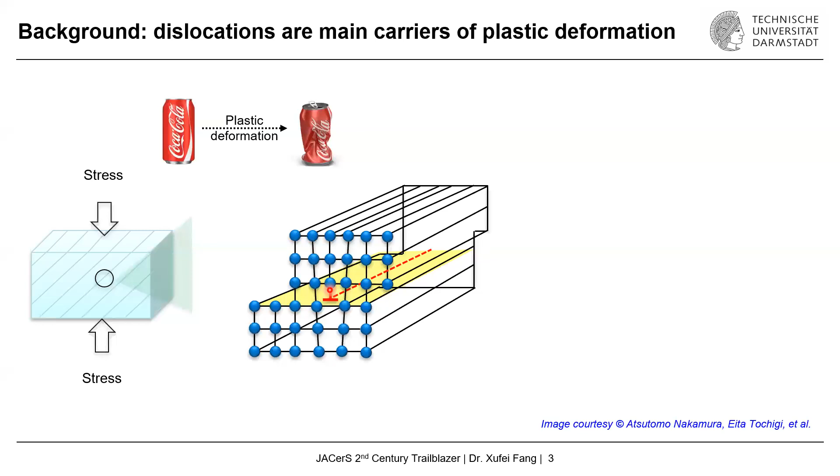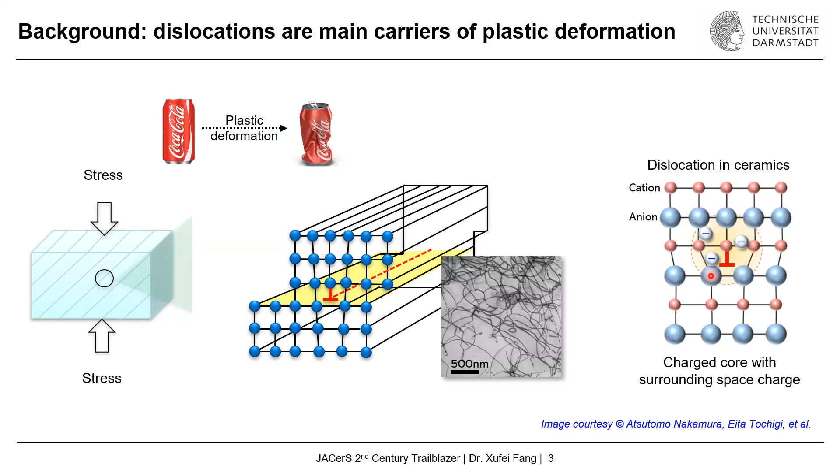Dislocations have been very well studied in metals. In comparison, dislocations in ceramics may carry charge at the dislocation core regions, surrounded by a space charge layer for charge neutrality. Together, coupled with the high strain field around the dislocations due to the high lattice distortion, this brings us a new perspective of using dislocations, for example, to tune different types of physical properties such as electrical conductivity, thermoelectric performance, ferroelectric properties, and even surface reactivity.

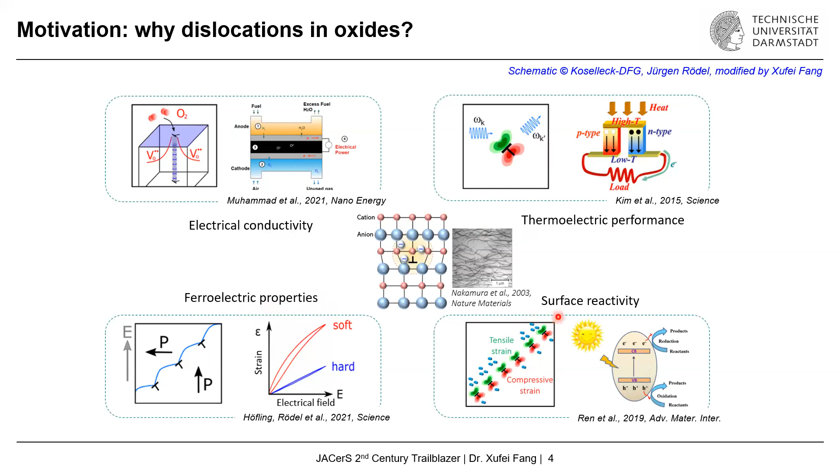I will show you several examples later. This brings us a new perspective of rethinking ceramics engineering for dislocation technology.

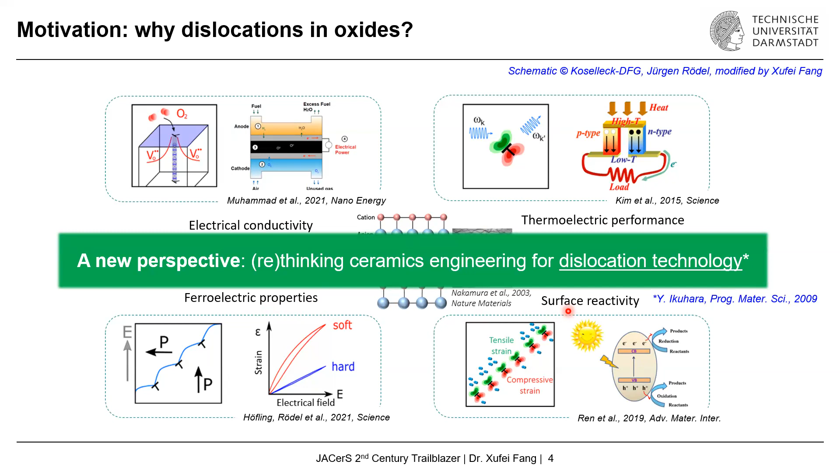For example, here I showcase using single crystal barium titanate deformed at high temperature, where we can introduce dislocations. This has helped to improve the large piezoelectric signal d33* by almost 19 times, mainly due to the dislocations we imprinted in the first place, which started pinning the domain walls and helped enhance the electromechanical properties.

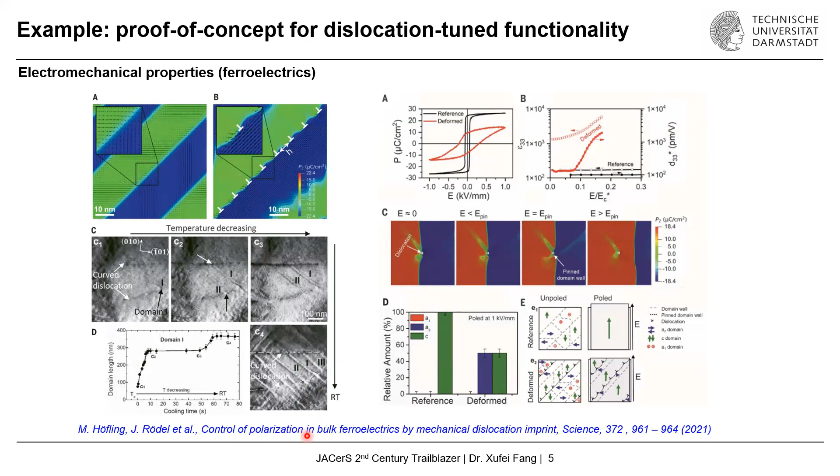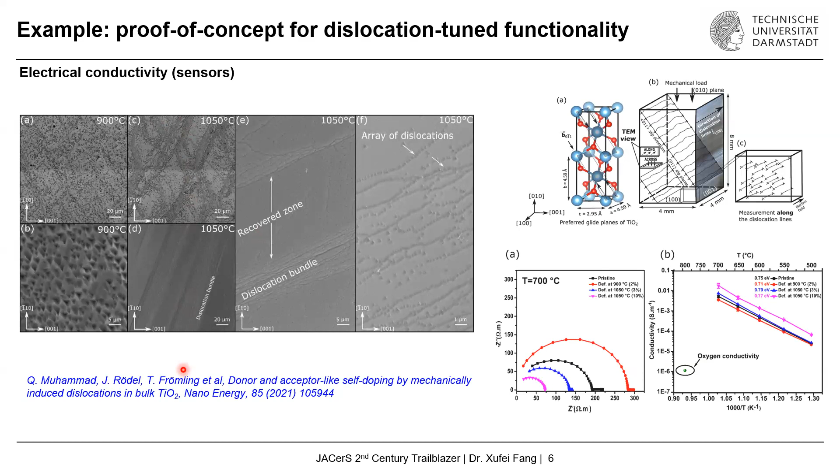Due to the time issue, I will not go into details, and I would recommend you read this paper from our ceramics division. Another example is high temperature deformed titanium dioxide, where dislocations are proven effective to enhance electrical conductivity. So in order to achieve all these types of functional properties, the prerequisite is to successfully engineer dislocations into ceramics without breaking them.

Here I would like to give you a brief overview of the methods to introduce dislocations into ceramics, which can mainly be divided into two parts: the first is processing and fabrication, and the second is through mechanical deformation.

For example, here is a bicrystal alumina fabricated by thermal diffusion bonding. Simply put, you take two single crystals and bond them together with a specific tilted or twisted angle. You will be able to engineer edge or screw type dislocations at the grain boundary. By the way, this is the grain boundary, and the dislocations are threading into the paper, or into the screen, in the 3D dimension.

Another example is the so-called flash sintering technique. The green body here is subjected to an electric field and electric current flow, and due to the highly non-equilibrium process, dislocations can be generated or maintained in the bulk. But the challenge of using this technique is that besides dislocations, we can also see a lot of other types of defects, for example voids, pores, and grain boundaries, making the scenario rather complicated to solely study the dislocation-based mechanical and functional properties.

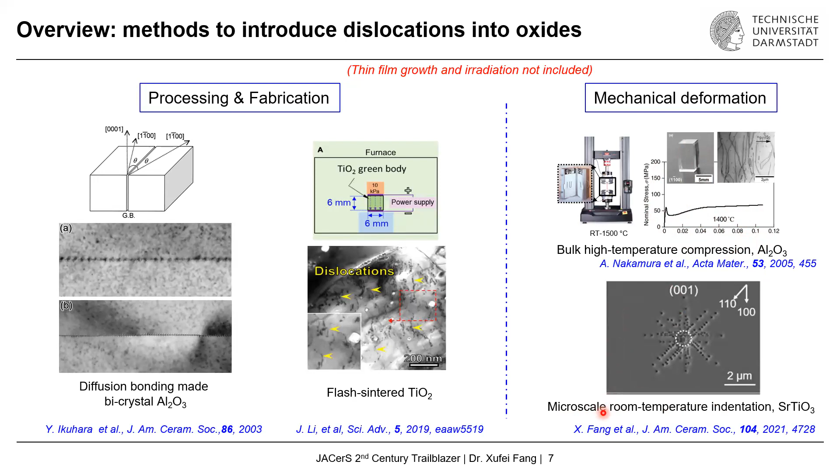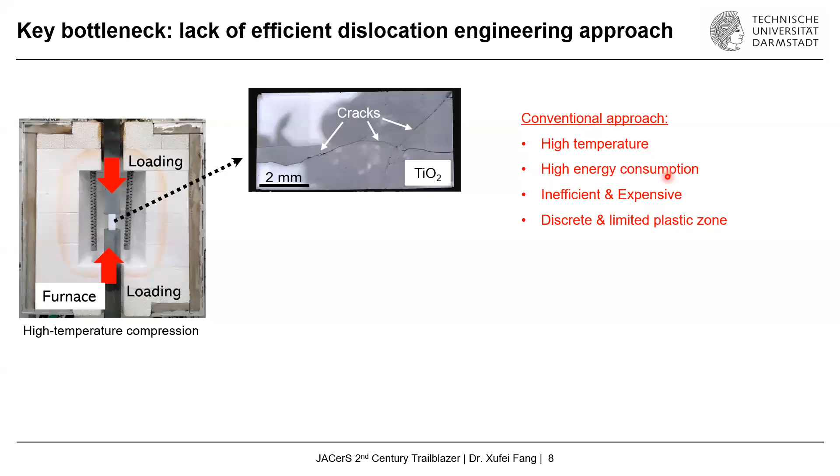As I mentioned, the key bottleneck to achieve the dislocation technology is to successfully engineer dislocations into ceramics, which are very often brittle, especially at room temperature. Currently, there seems to be a lack of efficient dislocation engineering approach. Even high temperature deformation does not always guarantee successful deformation of single crystals. The challenges for high temperature deformation are also evident, such as energy consumption, time consumption, and discrete and limited plastic zones.

In our group, we have been trying to achieve the following objectives: instead of doing high temperature deformation, we're thinking whether we can achieve intermediate or even room temperature deformation to accelerate this whole process. Compared to the discrete and limited plastic zone, can we also achieve a large and continuous plastic zone for easy handling of the samples? It has also been shown in literature that the higher the dislocation density, the more beneficial for both mechanical and functional properties. So in general, we would like to make the efforts much more efficient and cost effective.

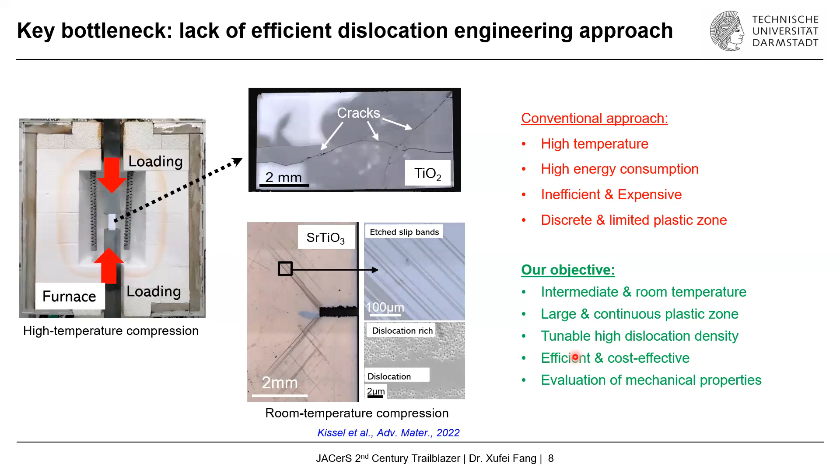In the next couple of slides, I would like to show you the overarching engineering principle for dislocation engineering at room temperature. Later I will focus on dislocation nucleation, multiplication, and motion, the three key factors I will explain through concrete examples. In the end, I will also give you an overview of the toolbox we have developed in the last 4 years for engineering dislocations.

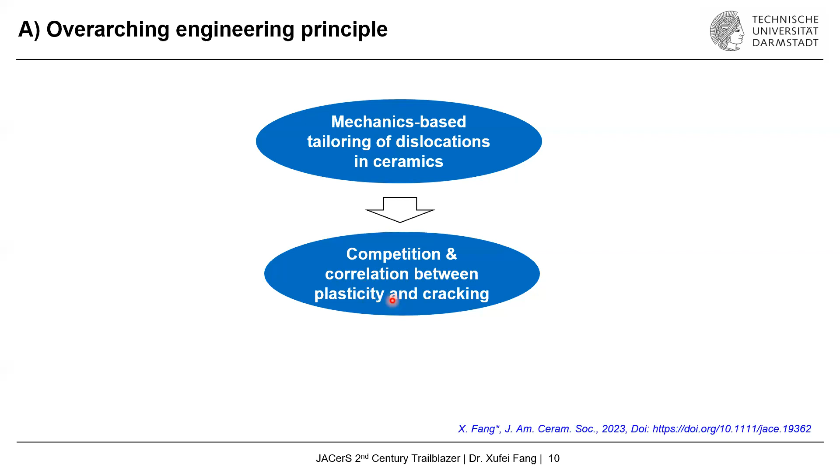When we look at the mechanical deformation of ceramics, in comparison to metals, we need to pay attention to, besides the possible plastic deformation, also crack formation, which is more prone to happen in ceramics because they are usually considered brittle. So that means we need to look at the competition between plastic deformation and crack formation.

In the specific case for dislocation-based plasticity, we would like to break it down into dislocation nucleation, multiplication, and motion. By nucleation, that means generating dislocations from 0 to 1, from the original dislocation-free region to having dislocations to start with. Multiplication, of course, is from 1 to n, from a couple of dislocations to many more dislocations. And of course, we need to make sure that the dislocations we generate are able to move. Otherwise, they will just become pinned and pile up, which would eventually lead to dislocation-based crack initiation and further crack propagation, which we actually need to try to suppress or avoid.

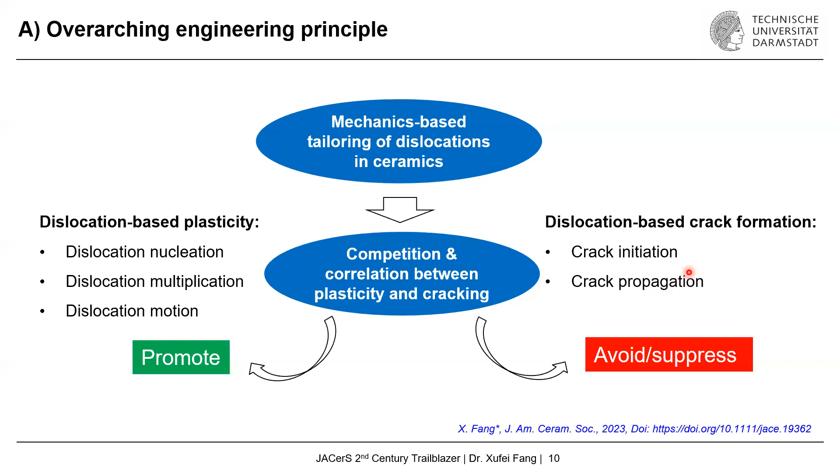Due to time constraints, I would focus mainly in this talk on dislocation-based plasticity, and for the rest of the crack-related studies, I would refer you to this paper.

If we look at the three key factors, dislocation nucleation, multiplication, and motion, our studies in the last years have shown that we need to avoid so-called homogeneous dislocation nucleation, meaning generating dislocations from the perfect crystal lattice, which is extremely difficult because it requires extremely high shear stress, even approaching the theoretical shear strength, which is the shear modulus roughly divided by 2 pi or 10, around 10 to 20 gigapascal.

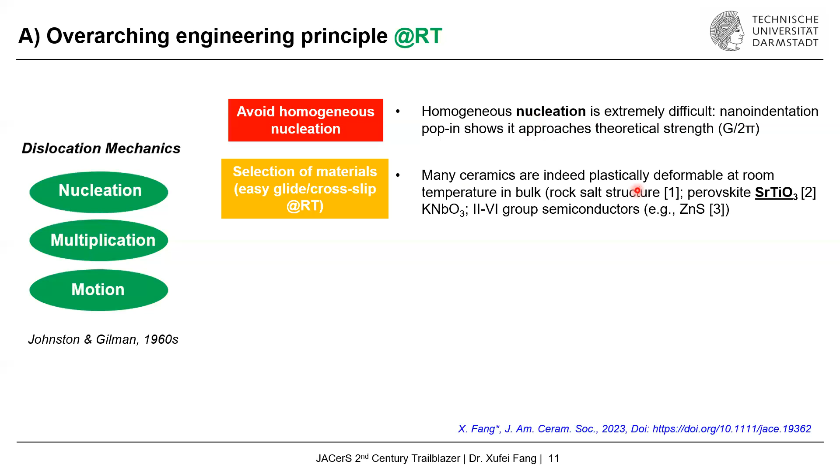The second thing would be we need to select materials, especially for room temperature deformation, in a smart way. That means we need to choose materials that already show some good ductility at room temperature, for example, the rock salt structure, sodium chloride, magnesium oxide, perovskite, strontium titanate, potassium niobate, and even zinc sulfide, etc. Once we have overcome these two components, the third part, dislocation multiplication, as later shown through cyclic loading, actually becomes rather easy.

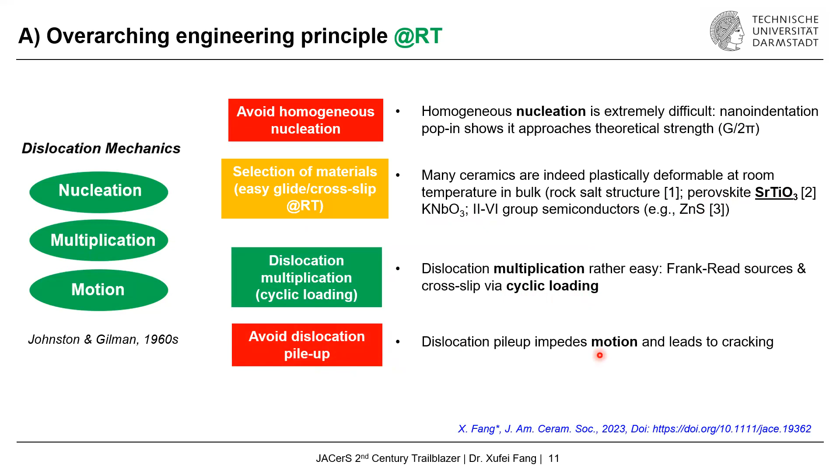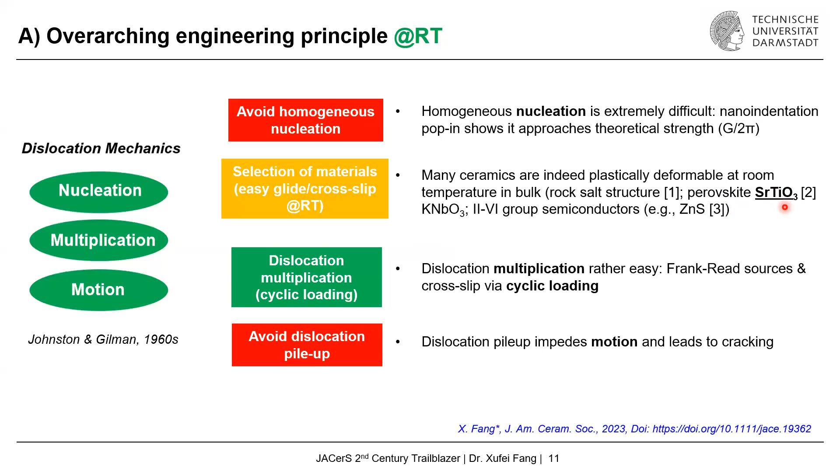Again, as I mentioned, we need to avoid dislocation pile up, which would also lead to cracks. So I will give you some concrete examples of the homogeneous dislocation nucleation criterion and also dislocation multiplication by focusing on strontium titanate, which already shows very good room temperature dislocation mobility.

Before I begin with the examples, I would also like to point out that in mechanical deformation, the boundary conditions matter a lot. By boundary conditions, I mean the temperature, texture, being either single crystal or polycrystal, the length scale—are we talking about nanoscale, microscale, or even bulk scale—pressure, external field with light or without light, with electric field or without electric field, etc. So I would like to narrow down my discussion and presentation to room temperature deformation, focusing on single crystals and ambient temperature and pressure conditions.

And to show you the capability of engineering dislocations across the length scale, meaning from nanoscale even up to millimeter-sized samples.

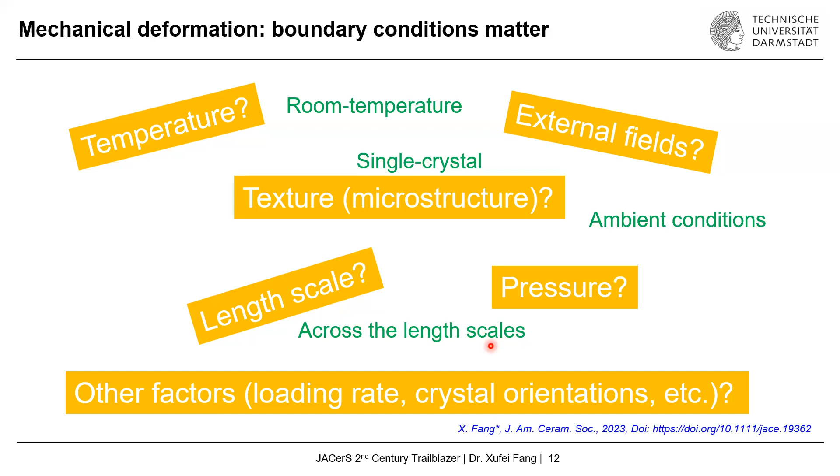So we begin with the dislocation nucleation, as I mentioned, generating dislocations from 0 to 1.

Here I would like to present the so-called nano-indentation pop-in technique, which is actually knowledge and skill set already established from metals. That's where I used to work 4 years ago before I started working on dislocations in ceramics.

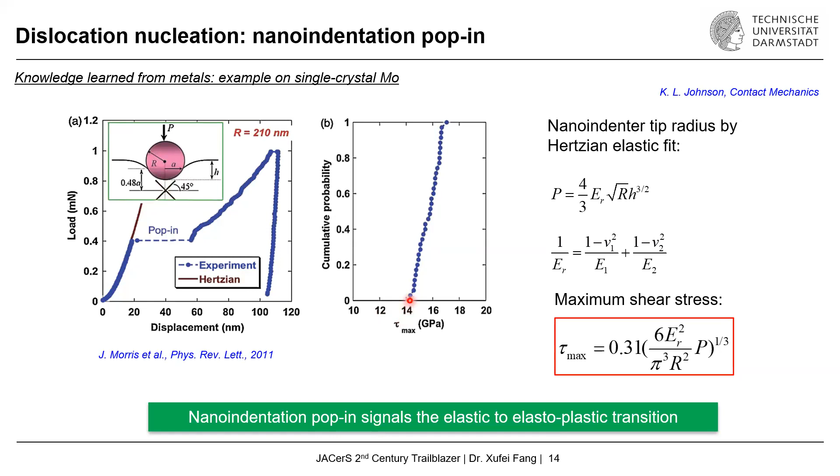In metals, it has been well established that this pop-in event corresponds to dislocation nucleation, meaning that originally underneath the indenter we have a dislocation-free region, and this popping event correlates to dislocation generation or nucleation. There are quite a number of equations to compute the stress level corresponding to the specific point when this instability occurs. The maximum shear stress required for this popping event, or nucleation of dislocation, in this case is around 14 to 18 gigapascal.

In our case, if we look at strontium titanate, this is just to show you an example. The starting material here, and all the yellow arrows point to pre-existing dislocations revealed by the old technique, chemical etching. These are dislocations interacting with your surface, where the local atoms are removed, so you see the etch pits corresponding to the location of dislocations. As you can see, most of the regions are actually dislocation free.

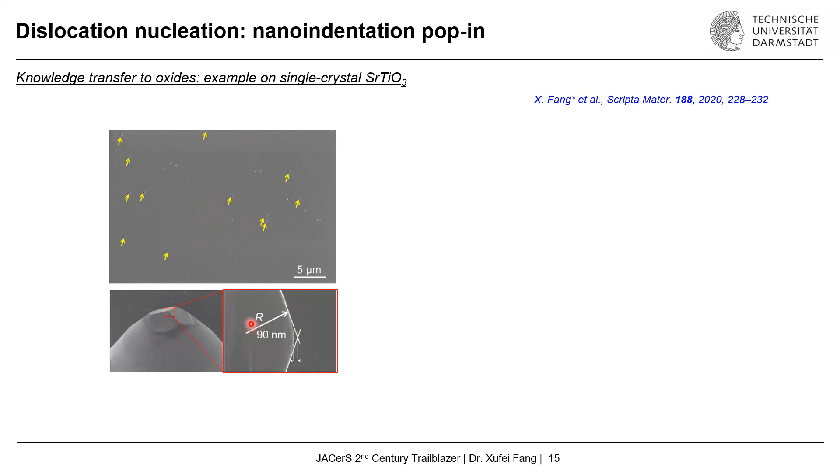That means if we place a very sharp indenter, for example with a tip radius of roughly 90 nanometers, we have an extremely high chance of putting the indenter into a dislocation-free region. What happens is we see a similar curve: load displacement, first deforming elastically as captured by the Hertzian fit, and then all of a sudden you have a jump. By computing the stress level corresponding to this event, we see actually also 14 to almost 18 gigapascal stress level, even for different strontium titanate samples with different stoichiometry.

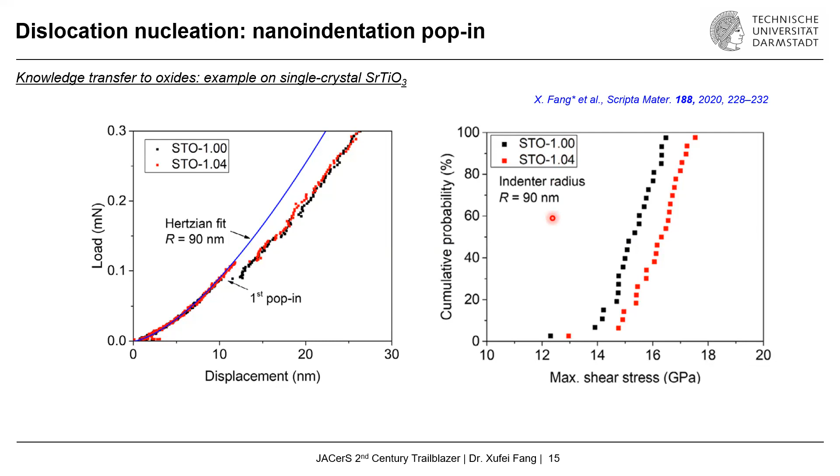So what does this mean? Can we also just directly transfer the conclusion from metals, saying this corresponds to dislocation nucleation? We need to be sure about that.

So we went ahead and tested different tip radii: for example, 100 nanometer, 2 micron, 5 micrometer, and 25 micrometer. The interesting thing is, for the very sharp indenter with tip radius below 2 micron, we see all dislocation etch pits showing no cracks. But if we look at the 5 micrometer and 25 micrometer indenter tips, we see both dislocation etch pits and also cracking.

So obviously there is a so-called new pop-in size effect. Depending on the size of the tip, we can either generate completely plastic deformation, or there's coexistence of plasticity mediated by dislocations, also cracking.

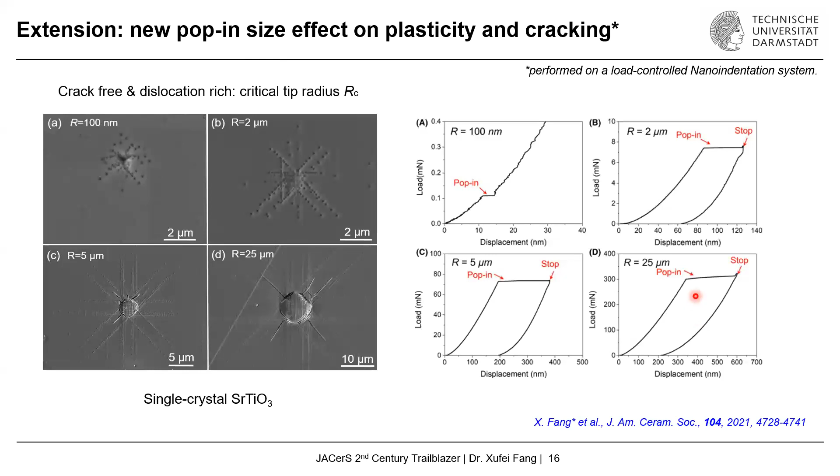These are the corresponding load displacement curves, and I will not go into the details, but rather show you, in the ideal case with a very sharp indenter, what would be happening underneath the indenter with respect to the stress level. Simply put, if we have a very sharp indenter probing a local region, we can assume the local surface is almost perfect, meaning no crack and no pre-existing dislocations. Based on contact mechanics, we can compute the maximum shear stress underneath the indenter. Very often it happens in this region, as well as the maximum tensile stress happening here.

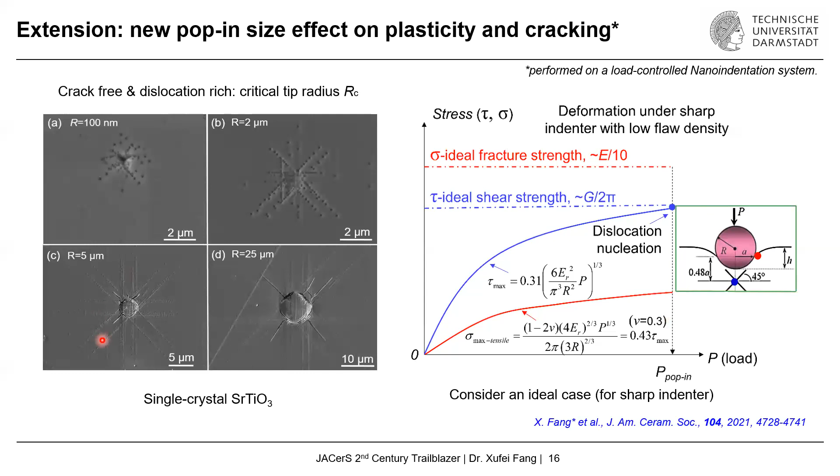We assume the maximum shear stress is responsible for shearing the bonds to break them for dislocation nucleation, while the maximum tensile stress is responsible for breaking bonds to create cracks. When we compare them to the theoretical fracture strength and theoretical shear strength, we realize the applied maximum shear stress can easily achieve the theoretical shear strength to break bonds and induce dislocation activity, even before the material can induce cracks. This somehow explains why the very sharp indenter can generate dislocations without creating cracks, but we are still working on what is happening with the larger tip indenter for the coexistence of cracking and plasticity.

And of course, we're not satisfied just working on one material system. That's why we went ahead and also tested barium titanate and single crystal titanium dioxide.

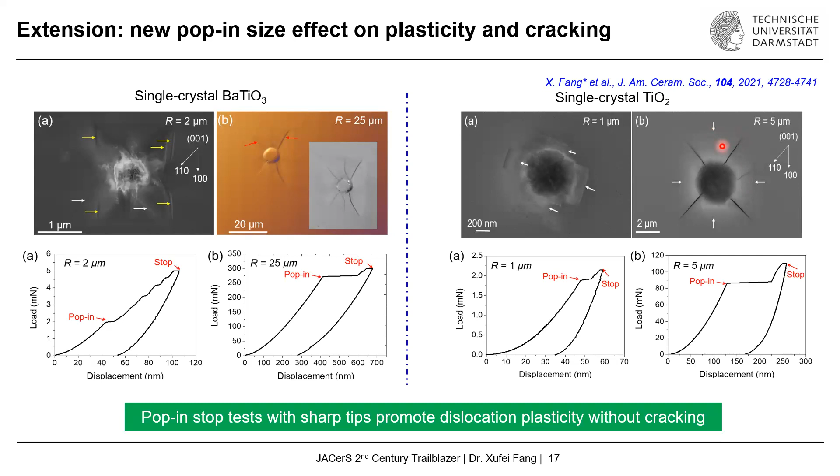It shows consistently that if we are able to engineer to use a sharp indenter, we will always be able to generate dislocations purely without cracking. But if we go to a tip radius larger than a critical value, we started seeing both dislocations and cracking. There is also a very interesting application based on this technique, which I will show you later.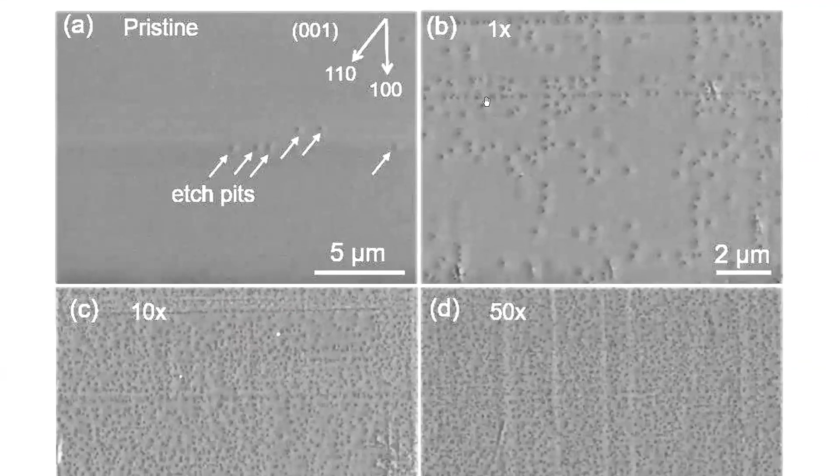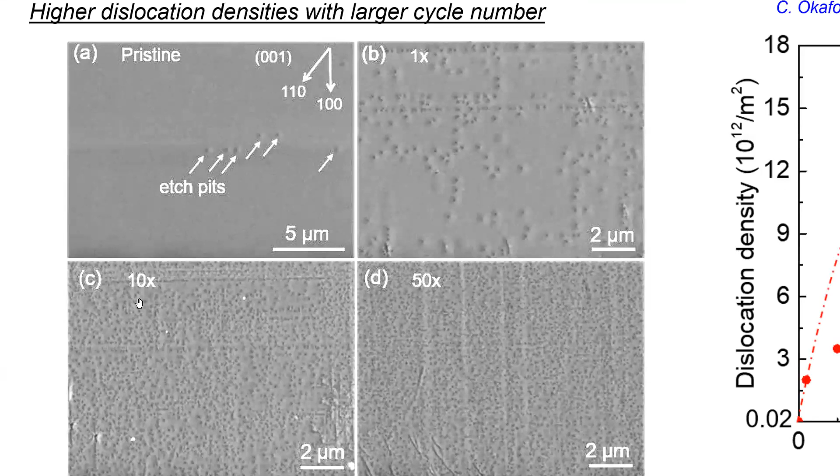When we take a closer look using the chemical etching technique, we started to see that the dislocation densities are increasing. Here is the pristine sample where you barely see some dislocations, and after 1 cycle we see a lot more. After 10 cycles and 50 cycles, we see many, many more, and there seems to be a saturation of the dislocation etch pits.

We plotted the dislocation etch pit density as a function of the number of cycles, and we started seeing almost 1,000 times increase in density compared to the reference sample. There also seems to be a saturation after roughly 10 cycles of indentation.

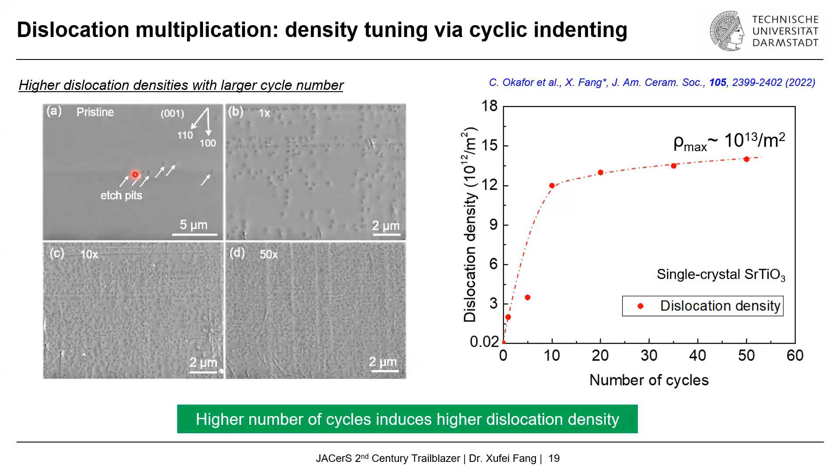We would like to point out that in this case, dislocation multiplication is happening, because we have a handful of dislocations in the beginning and they are multiplying to generate many, many more dislocations, which is very helpful for our dislocation-based mechanical and functional studies at a later stage.

We are not satisfied just working on strontium titanate, so we extended the method, also at room temperature, to another material, potassium niobate. As you can see, all the slip traces and dislocations, and also in magnesium oxide, zinc sulfide, zinc oxide, calcium fluoride, you can see the slip traces here and here and here inside.

Based on the size of the plastic zone and also the load, 1 kilogram or 1.5 kilogram, and the size, we can easily compute the mean average shear stress underneath, which is usually hundreds of megapascal. That's a strong indication that for these specific materials, their dislocations can move rather easily, even at room temperature.

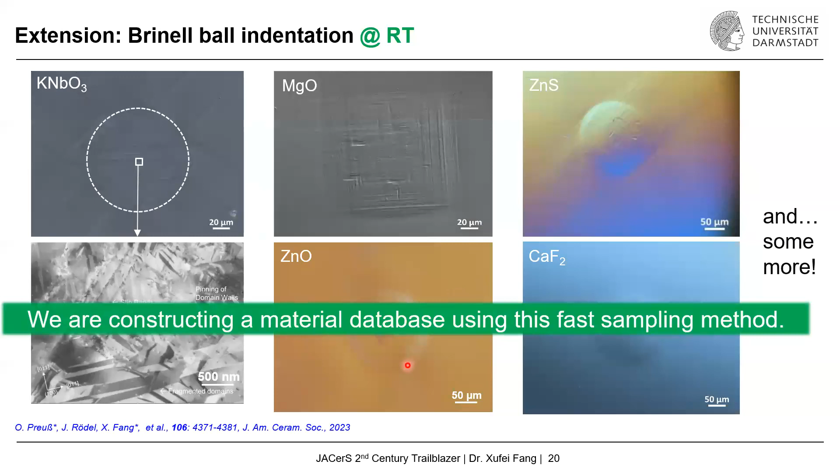We are also constructing the material database using this fast sampling method. Again, point loading using the indentation technique is not sufficient to generate a much larger plastic zone. That is why we started extending the indentation to scratching.

Here I show you the cyclic scratching method. This is one cycle just for reproducibility, 5 cycles meaning we stretch back and forth 5 times, and back and forth 10 times. Again, you can see the slip traces, the signature of the plastic deformation.

For 1 cycle, it's rather discrete, and for 10 cycles, the density gets higher and higher. That's, again, an indication of the high dislocation density.

This time, we do not use the old chemical etching technique anymore, but rather directly show you the transmission electron microscope images, which we take from the samples perpendicular to the surface within the wear track. You can see that after 1 cycle, the dark lines are the dislocation lines.

We have a couple of dislocation lines, and after 5 cycles many more, and at 20 cycles way more than what we can imagine even before we see these images.

Just to give you a brief idea, here we roughly have almost 100,000 kilometers of dislocation length within 1 cubic centimeter. We would also like to point out that there is no crack formation in this case, and all this was achieved at room temperature.

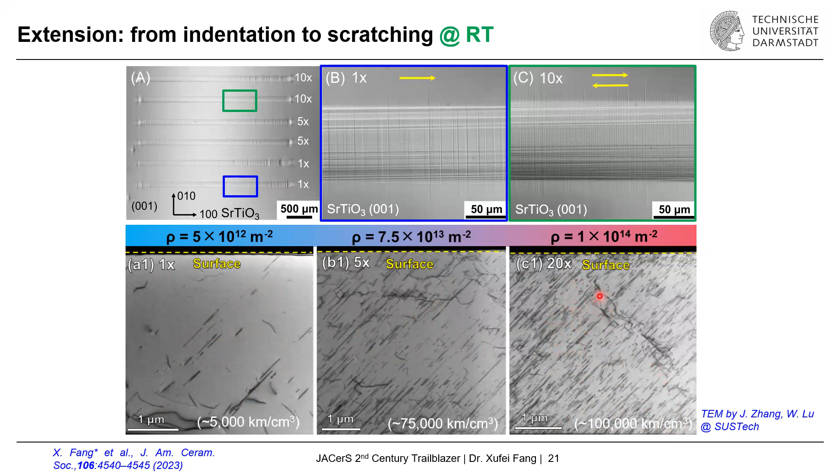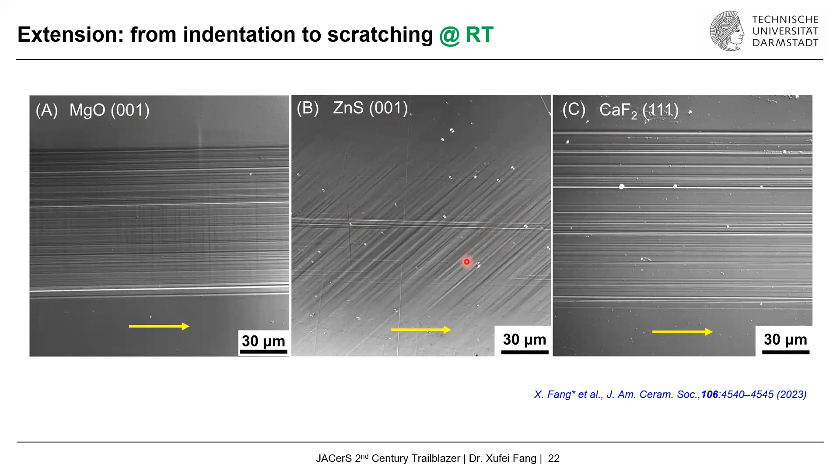This is the case study on strontium titanate. Of course, we extend it to another material system, for example magnesium oxide, zinc sulfide, and calcium fluoride, etc. So we can really see the general applicability of this technique, the cyclic indentation and scratching, for generating a much larger plastic zone and a much higher dislocation density.

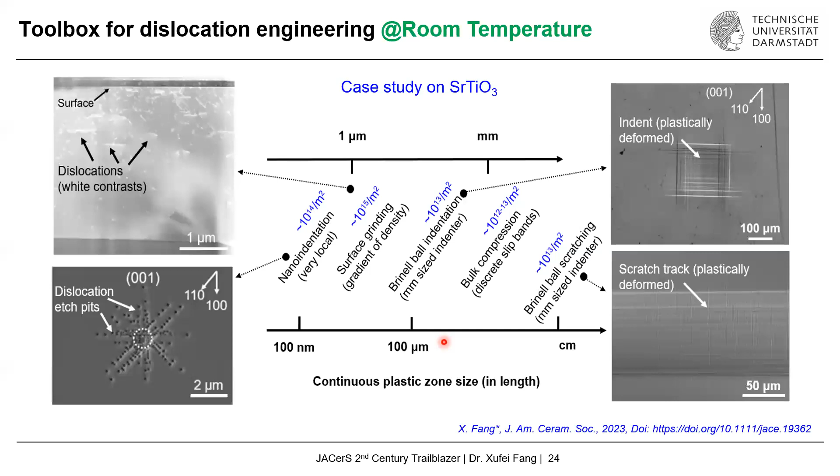This gives us a nice platform to use the dislocations for the functional and mechanical studies we mentioned at the beginning. For instance, the dislocation-tuned mechanical properties, I focus on the improved fracture toughness in strontium titanate. We first induce the dislocations, then put indents into the plastic zone, and see the crack lengths decrease compared to the dislocation-free region. This is a strong indication that the fracture toughness, or resistance to crack propagation, has increased, which is good news for ceramic materials.

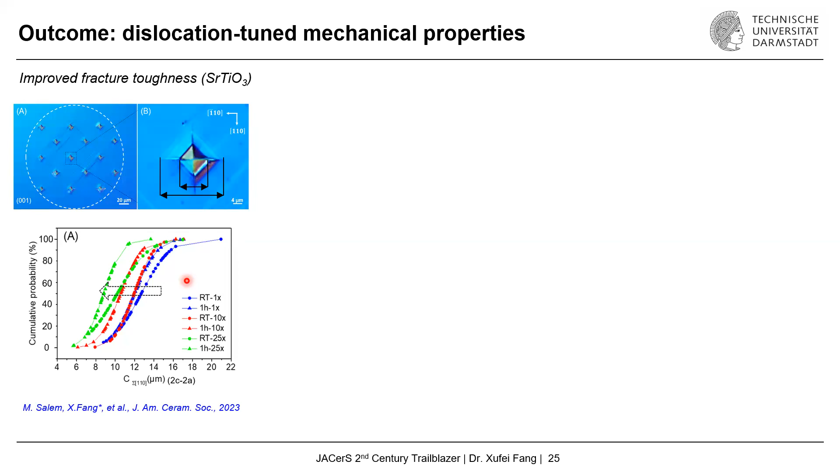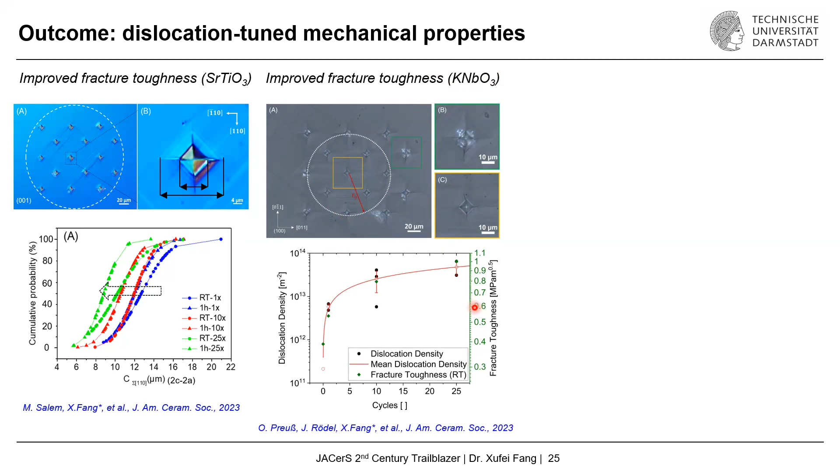We also see a similar trend for potassium niobate. After engineered dislocations, we see crack shortening even much stronger than in strontium titanate, and almost 2 or 3 times higher fracture toughness in the dislocation-rich regions compared to the dislocation-poor regions.

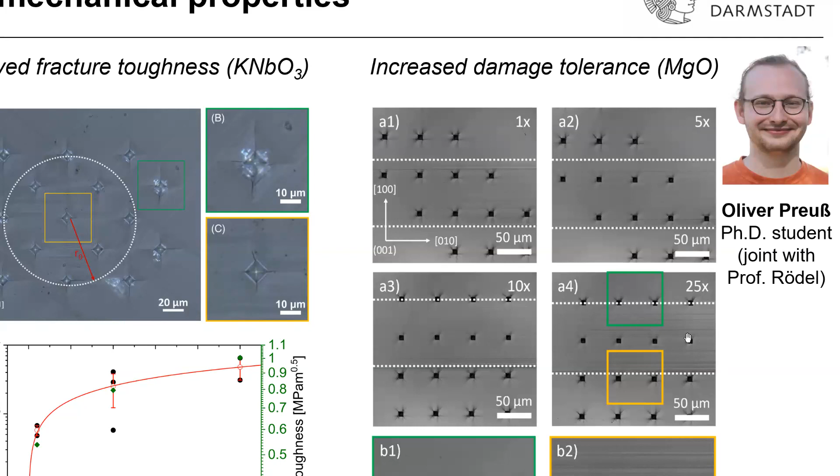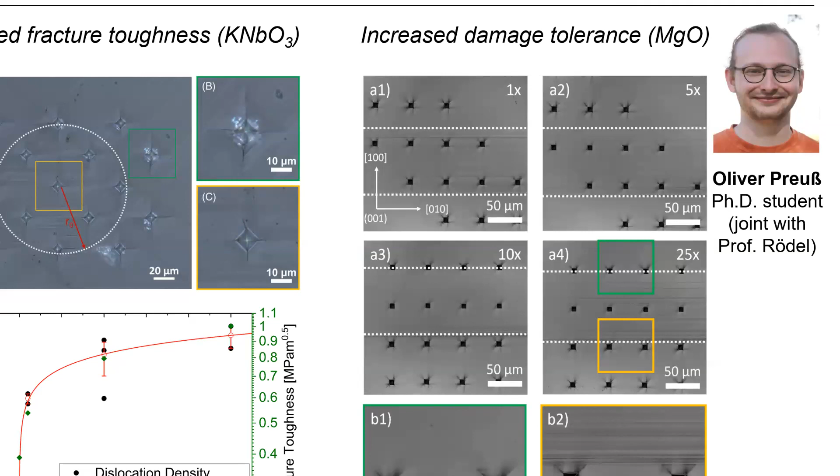What's more interesting is with magnesium oxide, once we engineer dislocations within this region, as indicated by the dashed lines, after 1 cycle we have a rather low dislocation density, and up to 25 cycles, very high dislocation densities. What's interesting is the cracks even completely disappeared, meaning we have a much higher damage tolerance if we pre-engineer high dislocation densities. This may seem counterintuitive, which is why we call it 'deform to perform' — first we plastically deform the material, and second, it performs much better with respect to mechanical properties.

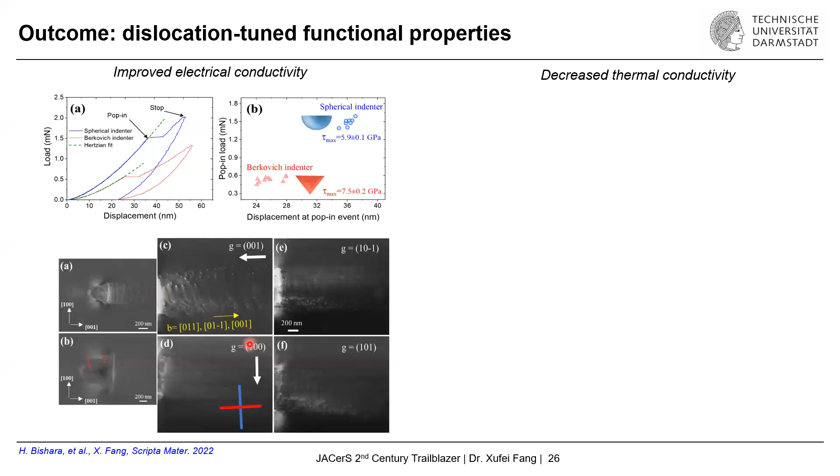I'd like to take a few more minutes to show the dislocation-tuned functional properties, using the nano-indentation technique I briefly introduced at the beginning for pop-in studies, where we engineer many dislocations, overlap the indents, and create a larger plastic zone. We see that dislocations engineered at room temperature can improve electrical conductivity by almost 50%. Another case is using pre-engineered dislocations to decrease thermal conductivity, which is also very important for thermoelectric figure of merit.

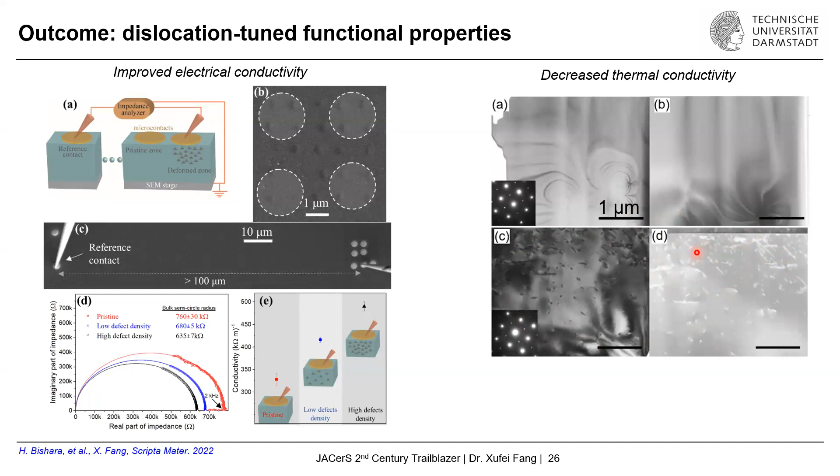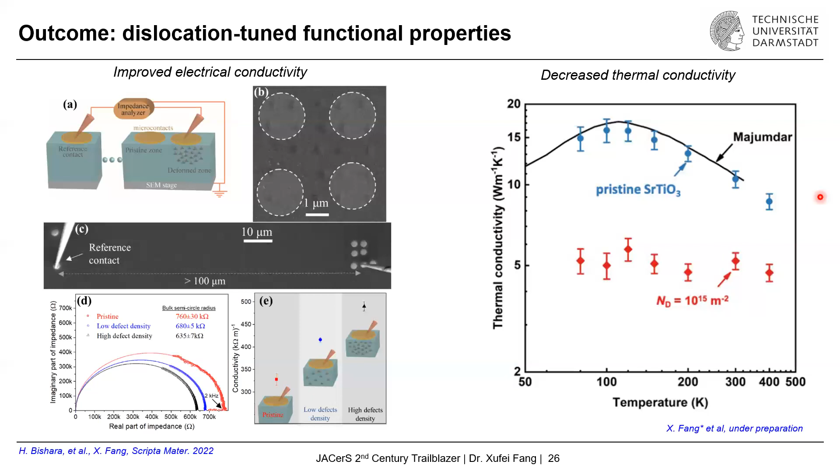In literature, it has been predicted that we need a dislocation density of almost 10 to the power 15 per square meter to see an impact on dislocation-reduced thermal conductivity. All these dots are experimental data with a rather low dislocation density, so a decrease in thermal conductivity was not really seen. In our case, we were able to engineer a density up to 10 to the power 15 per square meter, which shows a very appreciable decrease of thermal conductivity, almost 50% compared to the pristine samples.

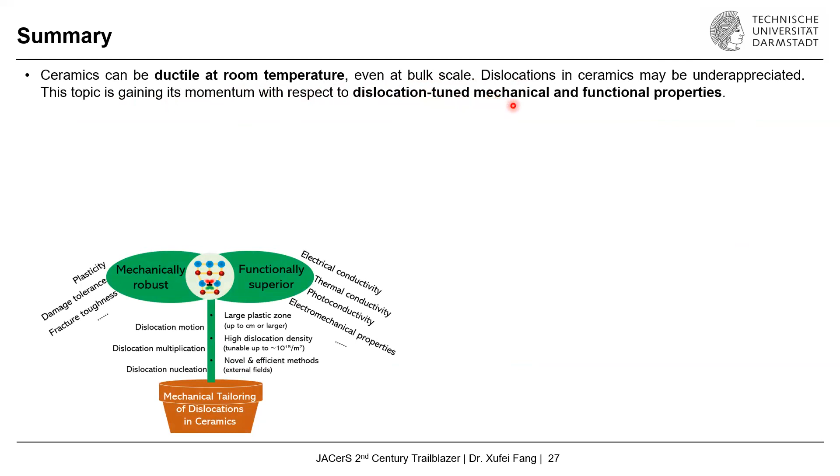To quickly summarize, ceramics can be ductile at room temperature, contrasting the conventional picture that ceramics are brittle, even at bulk scale. Dislocations in ceramics may be underappreciated, and this topic is gaining momentum with respect to dislocation effects on mechanical and functional properties, as you can see here.

In this talk, I showed details and examples focusing on room temperature mechanical deformation to engineer dislocations, particularly by examining deformation boundary conditions, looking at dislocation nucleation, multiplication, and motion, as well as suppressing crack formation. We can achieve plastic zone sizes up to centimeters in length, with densities approaching 10 to the power 15 per square meter, which serves as a platform for much more dislocation-based research.

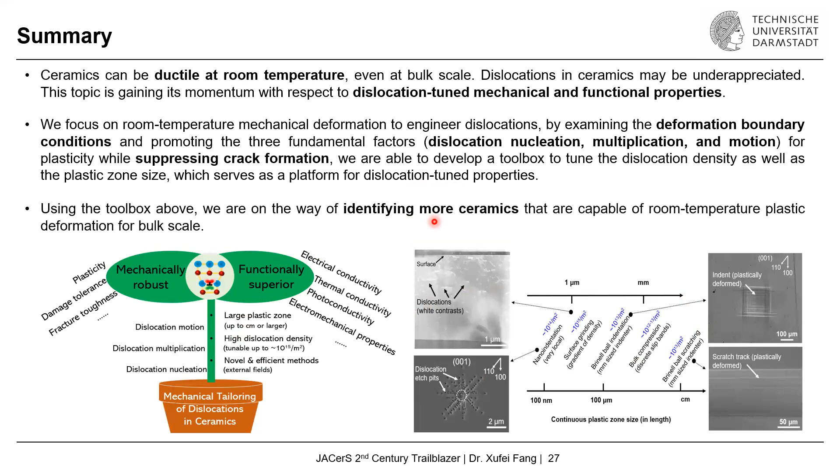Of course, we're not satisfied with what we have now, and we're keen to identify more ceramics that can show room temperature bulk plastic deformation, to maybe help change your view toward so-called brittle or ductile ceramics, even at room temperature. I hope I've successfully triggered your interest in this topic, dislocations in ceramics.

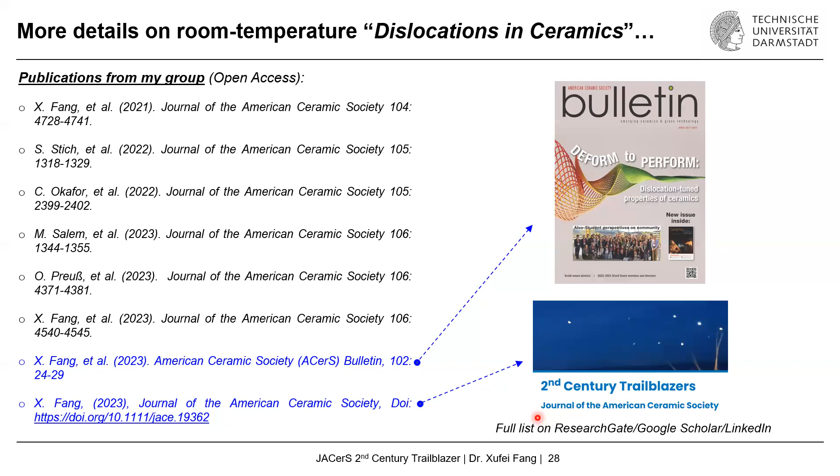If you're interested, I'd recommend some of the work mainly done by my master students in the last several years, particularly these two overview articles invited by the ACerS Bulletin, and also the article I mentioned at the very beginning for the Second Century Trailblazer.